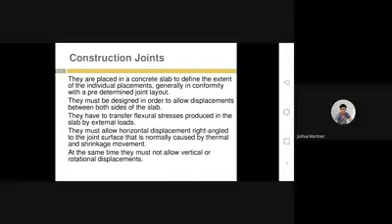Number two, they must be designed in order to allow displacement between both sides of the slab. Okay, masyadong elaborate yung definition niya, but ang pinaka simple definition ng construction joint is again to divide or to stop yung construction. Yung point of stopping the construction where it's difficult to make it simultaneous, yung pouring of concrete - that is the most simplest definition of construction joint. Okay, this is a graphic showing.

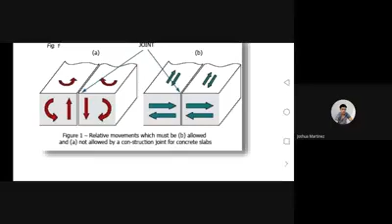This is purely engineering, showing the slab. There's movement on the slab - you have torque, lateral movement, and up and down vertical movement during earthquakes. You also have torque, twisting, where the ground rotates, so your building will also rotate and you will encounter cracks on the building, on the flooring, on the walls, and even on the columns.

If you have an irregular structure, like a mansion, in between the small building and the big building, you will definitely have a crack on that part if you will not put an expansion joint or a construction joint.

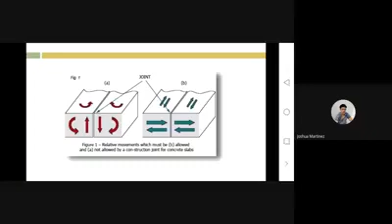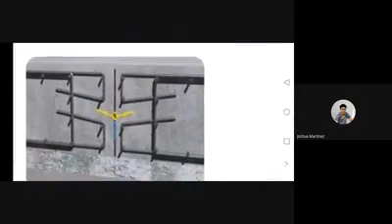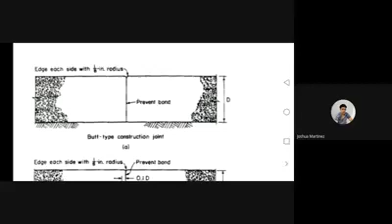So this is the section, a common section. Say we have a concrete slab, we sometimes have a construction joint, a butt joint, butt type. This means the left side will be poured first, and then the right side will be poured the next day or next few weeks. This is what we call a butt type construction joint.

Then for others, like precast concrete, you have a tongue and groove type, similar to wood. Since it's precast, say for concrete piles or flooring, you have this type of construction joint. The concrete is precasted somewhere in the factory, the panels are poured separately by piece, and on site you will just combine the panels to form the slab or the walls.

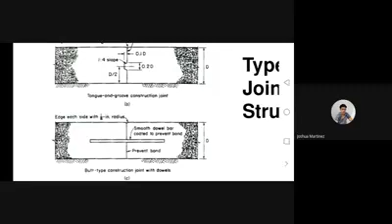This is for roads. You can see this type in roads - you have a dowel. On the first two types, you don't have a reinforcement bar, but on the third type, this is a dowel or reinforcement bar used to join two concrete panels. This one is very common in roadways, especially for roads and pavements.

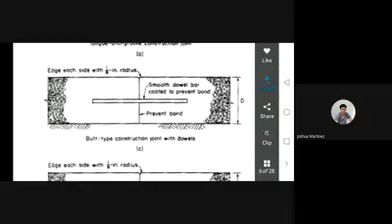You have one that is a smooth dowel, probably a round bar, but I don't know why round bar. Preferably, I prefer the material to be deformed bars, the actual rebars. With a round bar, it's almost useless. For me, a round bar is very useless.

Now, expansion joint - this is what I've been telling you about. An expansion joint is when you have to divide the building because the building is already very long. Minimum in the building code is 50 to 60 meters maximum length for every building. So if you have a longer building, you just divide it into two. It's up to you where to divide it, as long as you meet the requirement, minimum being 50 or 60 meters or less.

One reason for an expansion joint is if you have a very long building. The second reason is when your building is irregular - say your building is not rectangular, or has a different shape. I'll show you graphics later. Say your building is L shape, T shape, or U shape, and other shapes like that.

So if you have a T shape, you have to divide the building into two pieces. The intersection point is where you will put your expansion joint. For a T shape floor plan, you have one expansion joint. But for a U shape building plan, you need two expansion joints, at the intersection points. And then for other shapes like that, I'll show you later on.

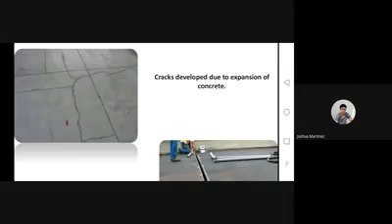For examples, guys, we're not at Adamson, but in Adamson you can see the flooring has many cracks. The building is old and we've had many earthquakes already, so of course the slab has many cracks. The one supporting the slab where the cracks are is the rebars inside, so that's why it doesn't collapse.

This straight line is actually the control joints, but again, the control joints couldn't handle it and the cracks really showed. Usually the control joint or contraction joint is the one to control these cracks. But again, the crack still appeared on the surface. Maybe due to the strength of the movement, the earthquake or ground movement was so strong that the crack became obvious, shown on the surface. This is common on skyways, flyovers, or bridges. This is what we call an expansion joint.

Need of expansion joint in concrete. So again, why do we need expansion joints? First, because there are movements on the ground.

Second, because of thermal heat and cold, the temperature changes, especially in tropical countries where we have very hot temperatures. So the material, every material, expands and then contracts or shrinks. There's movement in the material itself because of the temperature from the sun, or from cold weather during rainy season, cold season, or snow in winter season. All materials, especially concrete and steel, expand and then shrink. That is why cracks will occur if your material expands or shrinks, since there will be cracks because of the temperature change.

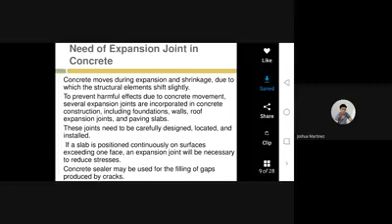Characteristics of expansion joints: it permits thermal contraction and expansion, same as before, so it will permit contraction due to thermal or heat, and expansion. It is designed to safely absorb the expansion and contraction of several construction materials. The vibration, if you have equipment like generators or air conditioning, causes vibration on the flooring and walls, so this can be avoided. Cracks can be avoided if you put expansion joints.

They are normally located between sections of bridge slabs. I'll show you later the points where it's located. It is simple.

These are examples of expansion joints. Commonly they can be seen on bridges, masonry -- meaning concrete walls, concrete slabs, or CHB bricks -- and railroad pipes. In pipes it's important to avoid leaks, especially during earthquakes, so they have to put expansion joints.

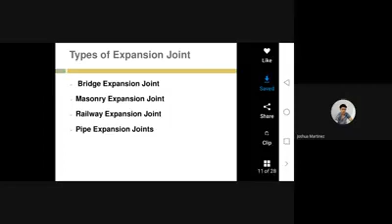For bridges and flyovers, this is very common. You can see this in EDSA, Makati. In flyovers, there's a gap in between, around 50 to 75 or 100, sometimes more. So to cover the gap, they put steel plates.

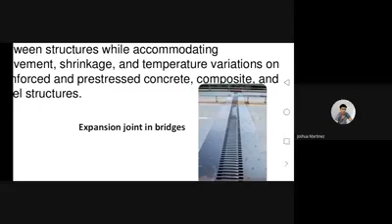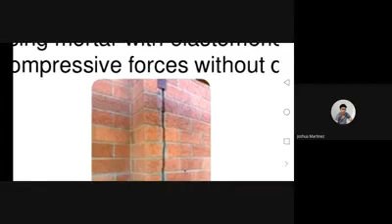And then for the masonry, like the brick wall, they also need to put a gap in between. Because the crack will definitely happen at this point. So you need to intentionally put the gap. You need to install the gap. We should anticipate the part where the cracks will happen. And this can be treated with aesthetic or groove.

Clay bricks expand as they absorb heat, and again, clay or hollow blocks also expand during heat or moisture. They shrink or they expand. This places compression stress on the brick. And once they expand, the cracks will happen. A joint replacing mortar with elastomeric.

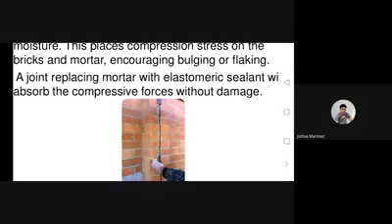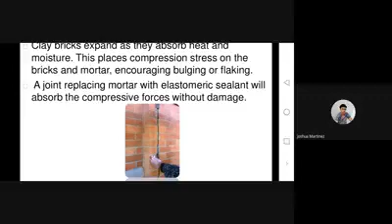Okay, so in the gap, usually we put sealant, elastomeric sealant. Similar to what we put on windows, those are rubberized, to cover the gaps, and absorb the compression forces without damage. So during ground movement or thermal expansion, the joints can handle the movement without any damage to the material, because it's rubberized. It's elastic. So no problem with the joints.

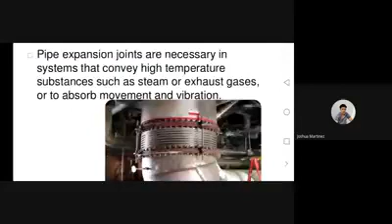So for the MRT station or PNR station, we have these joints. Especially during earthquakes, to prevent the train from derailing, they put expansion joints on the rails. And this is for the pipes. These are very flexible expansion joints. This is very common now; Manila Water or MWSS is now installing this in water supplies to prevent damage during earthquakes.

Because once we have the big one, we are expecting the big one earthquake in Metro Manila, damage will be reduced and we still have supply during disasters. Water supply is very important to humans. Okay, rubber expansion, fabric expansion. These are the types of expansion joints: rubber, fabric, metal, toroidal. This is more on engineering already. No need for this one.

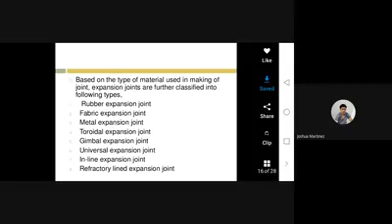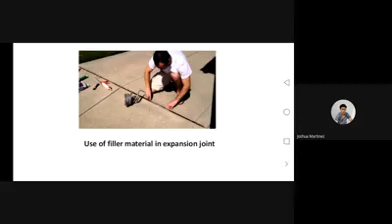So this is the filler. On the gap, on the expansion joint, you put fillers. If not sealant, you can put rubberized material. Actually, any material that is rubberized or flexible, you can put on the joints.

Guys, the reason I'm discussing this is for your plate tomorrow. I'll show you the plate tomorrow. In prelims, we already finished structural, the skeleton, the basic structural support of the building. So now we will proceed with midterm. I will concentrate on movement and joints, and waterproofing on buildings to avoid leaks. So tomorrow I will discuss that.

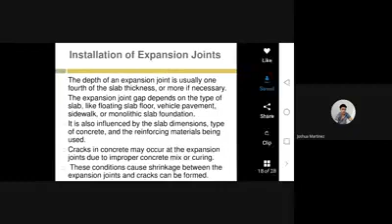Can you follow? Are you still there, guys? Just to check. Sorry. Are you still there? Yes, sir. Yes, sir. Okay, thank you.

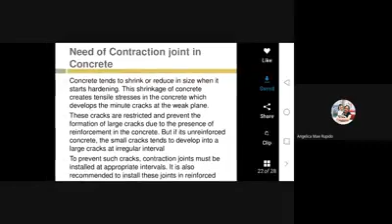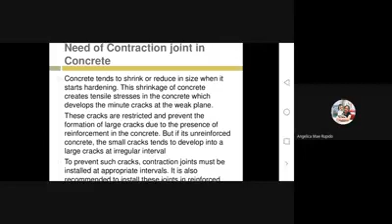Again, guys, the reason is basically the same. The reason for expansion joint and contraction joint is almost the same. Concrete tends to shrink or reduce in size when it starts hardening. Shrinkage and expansion, it's the same with expansion joint. So the reason is almost the same in all, except for cold joints. Cold joints have a different reason. To prevent cracks, contraction joints must be provided.

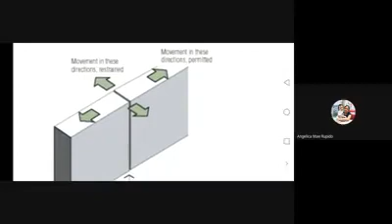So this is on the wall. You have a contraction joint at the middle, so now the wall can move freely. If you have an expansion joint or contraction joint, your walls can move freely during a mild earthquake or ground movement, and the cracks will be avoided. And in the gaps, you have the rubberized sealant.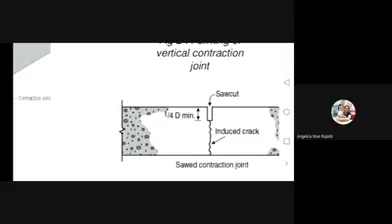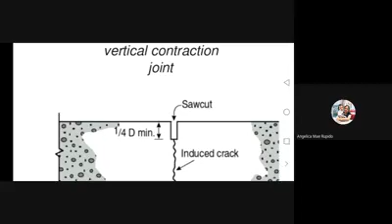Now, guys, this is commonly used on sidewalks, pavement, or slabs. It's not a construction joint. The concrete is poured at the same time. This concrete is monolithic. So we need to put a joint, and the way to do it is by using a circular saw. They will cut the slab, not very deep, just on the surface. About 12 mm, or 6 mm. Say 6 mm. They will just put a line on the concrete.

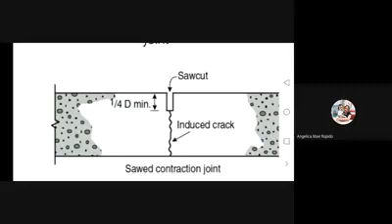And then once cracks happen on the lower side, they will immediately go to the saw cut, the groove line or contraction joint that you made using the circular saw. And you cannot see the cracks on the exposed surface. You only have cracks below. But on the surface, you don't have cracks. You have a very beautiful saw cut groove. It's just groove lines.

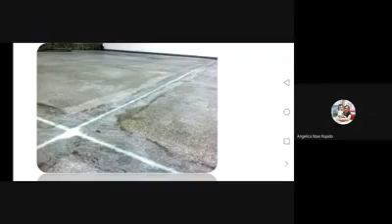Isolation joint naman, guys, is when you have two parts of the building that are separately constructed. Say yung column. The column is separately constructed from the slab. So in between the column and the slab, you have to put isolation joints, kasi separate sila, separate parts of the building. So if you will not put an isolation joint, imagine guys, if the column moves because of ground movement, your slab will have cracks, kasi you did not put isolation joints on the perimeter of the column.

So if the column moves, obviously yung pinaka weak, the weakest, is the slab. The column is stronger, so the crack will happen on the slab. Because the column is stronger than the slab, if you have movement, your slab will have cracks. So in order to avoid cracks on the slab, you have to put isolation joints, and then you need to put sealant to cover yung gap.

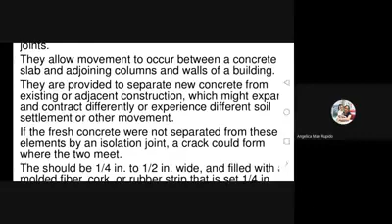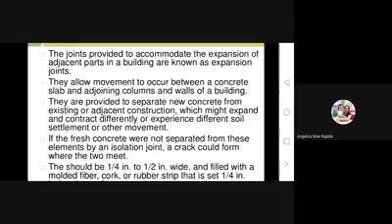Again, the size of the isolation joint is around 1/4 inch or 6 mm to 1/2 inch, 12 mm or 15 mm, okay. The bigger for me is okay. Also, this isolation gap on the floor, between the slab and the column, is usually where termites and ants enter our house. That's why you need to put isolation sealants or any rubber strip, cork or molded fiber.

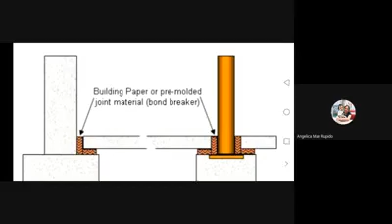Okay, this is an example. So these are isolation joints. You have the column and the slab, two items constructed separately. So again, to avoid cracks on the slab, the weaker item, you need to put isolation joints. So parang ganyan siya, guys. Actually, at the bottom, kahit hindi na, on the vertical lang. The horizontal part, maybe no need na. Their contact point is only on the side once there's movement. Okay, these are examples of isolation joints.

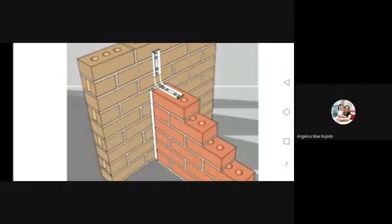On the walls, the first wall was constructed first, then the second wall was constructed on another schedule. That's why you need to put isolation joints here to avoid cracks, kasi separate items, separate parts. Okay. This graphic here is more interesting, to show you my point. Expansion joint and construction joint, okay?

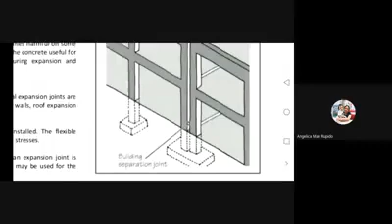So this graphic shows a very, very long building. The building is divided into two, so you have two columns. Usually ganito din ang technique ko, guys. This is the best joint for me, the strongest joint I always use in my projects in Chiyoda. So I have two columns. Before, hindi ko naintindihan, guys, but slowly, after checking all drawings, I realized the importance of the construction joint. It looks like a big waste of money.

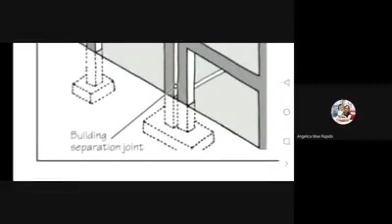Imagine you have two columns in the same location. At first, it seemed weird to me. I didn't know the reason why they have two columns in the same location. But later on, after reading the structural codes, I realized that this is actually a very good technique to avoid cracks. But the foundation is combined. The columns can move freely and they sit on the same foundation. Your columns, your walls and the slab can move freely without any cracks.

Even on the roofing, we just put flashing on top of the parapet. We just put flashing. We will use this in your 3-story mansion. I will teach you how to do this.

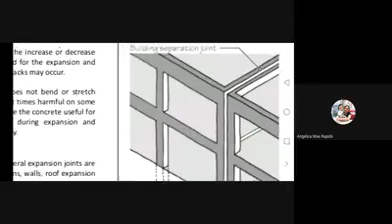Again, if you read this one, the reason why we need expansion here is because the material expands and contracts with increase or decrease in temperature, thermal expansion or shrinkage, and also because of movement on the ground, on earth, earthquake.

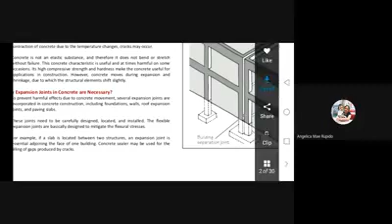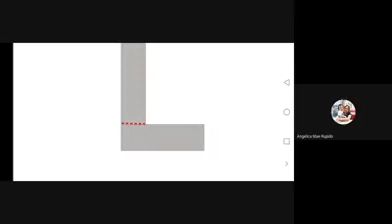For the bottom part, this is what we call expansion joint. No, this is construction joint. If this is a footing, this is a construction joint. But if you look at this one, say this is a building plan, your shape of the building is L shape. So we now call this one an expansion joint. Kasi again, your building floor plan shape is irregular. So you need to separate the L-shaped building into 2 buildings na.

You have 2 smaller buildings na. So this is the correct position of the expansion joint. Kasi during earthquake, you have torque. Yung torque is rotation on the ground floor. So if you did not put an expansion joint, one of the buildings will definitely collapse. Kasi yung stress will be centered on this area. Can you imagine, guys, if you have the ground move rotated, mapuputol. Your building will collapse on one side.

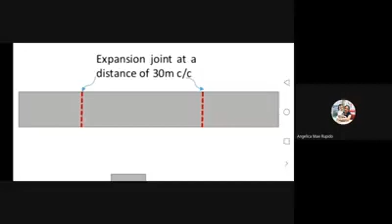Can you still follow? This is very important, guys, kasi karamihan ng architects, they just rely on engineers where to put the joints. And hindi sila aware actually kung saan yung damage ng building during earthquake or kahit mild movement on the ground.

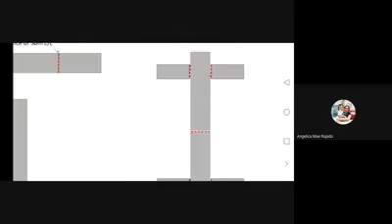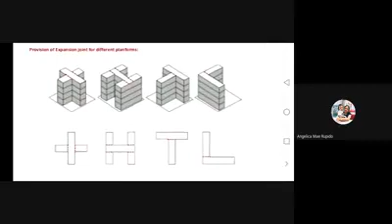Okay, this is another example of a building. This is an I-shaped building. So again, if you have an I-shaped building, you need to divide this building into how many parts? 1, 2, 3, 4, 5, 6. 6 parts. Okay, guys? So your slab is divided. Your slab, your walls, your column is separate. So you have 6 buildings here. Okay, these are more examples. So the red part is where we put the expansion joints. Kasi we architects usually design very irregular shaped buildings.

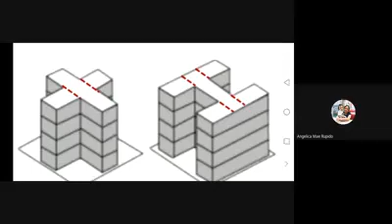In my practice in Chiyoda, very boring dun eh. Bored talaga ako dun actually. They don't want irregular shaped buildings. They just want a square type building. Imagine, very boring. Kasi we have extra force pa behind. A blast resistant building should be simple shape lang. But minsan, they give me administration buildings, very far na from the blast area. Administration buildings, accommodations, condominiums, hospitals.

Okay, guys, I hope you understand this one. Any questions so far? Sir, paano po kapag curve yung structure ng building? Yes, yung curve. Okay, you have to measure the circumference. So at least yung circumference niya, wag mag-exceed ng 100. But if you exceed 100 or 60, you need to divide. So say your circumference is around 200. So you need to divide the curve into 4 parts. Quadrants na siya.

The expansion joint, you cannot actually see on the architectural. You can actually hide that one in the structure. Kasi we have finishing. On the flooring, I will show you the finishing later on. Very, very good finishing sa flooring, sa walls. I will show you examples. Maybe I can show you now. Hold on.

For your exam, I'm actually preparing na your midterm exam. Guys, huwag kayo magtatampo kung maraming exam ko, ha? 100 items. Kasi kahit sa Viscom, ganun din, 100 exam din. First semester, okay. Technical.

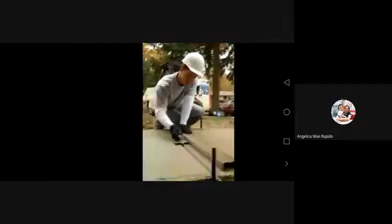Joints in concrete, okay. So this one, wala pa siyang bakal. Wala pang expansion joint. There's an expansion joint, but wala pang covering. Oh, this is isolation joint. This is, guys, monolithic yung pouring ng concrete. Same time yung pouring ng concrete. But nag-put lang siya ng line.

The concrete is still wet, but he just put a line. Hindi siya nag-sokat. Sokat is when the concrete is already dry. When the concrete is already solid, you have to cut using a circular cutter. But this one, the concrete is still wet. You can just put a line for the contraction joint. This is contraction joint, guys.

Okay, this is actually that one. No, ito yung section niya. But this one is sokat, guys. Sokat is when the concrete is already hard. No, you need to use circular saw and then cut the concrete. This one is still wet. So nag-cut lang siya using tools. The concrete is still wet. Okay, guys? You just try to observe lang in the road or pavement, sidewalk kung saan.

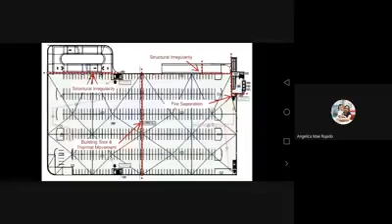Now ito guys yung example ng expansion joint. Say yung car park, ang haba ng car park, more than 100 meters. Siguro this is around 200 pa ata to. Or say 100 na lang. Mukhang 100 lang siya. So it's divided into 2. Ito. Actually, it's divided into 3 parts, guys. One, yung siya yung ramp. Kasi irregular shape na siya eh. It's not rectangular. And also, yung ramp is different ang structure niya. It's concrete. So you have joints also here.

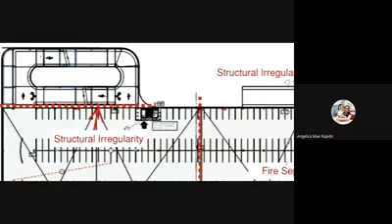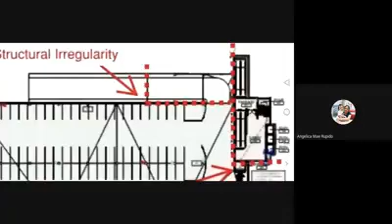So how many buildings now here? 1, 2, 3, and 4. 4 buildings siya. Or 5 pala. Sorry, 5. May ramp pa pala dito. Because of irregularity. Because this is also a ramp. This one is a ramp. And this one is ano to? Siguro this one is yung elevators, yung vestibule, yung building. So it's separate. So you actually have 5 buildings, no? But in architecture, you cannot see that it's divided into five buildings. Only in structural you can see this one. But your building is safe from cracks, from damage. It can move freely during earthquake.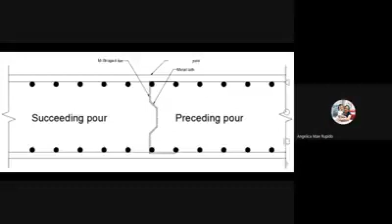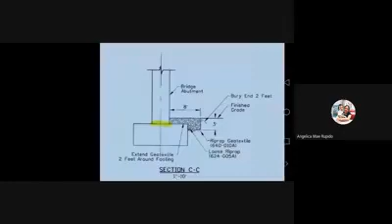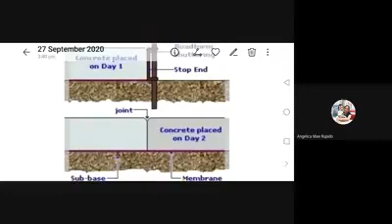Okay, ma'am, did I answer you? Did you understand? Sino nagtanong? Yes po, sir. Thank you po. Okay.

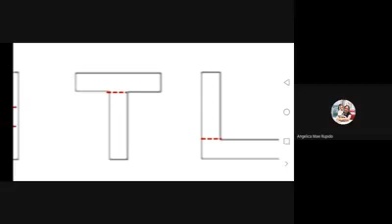Actually, guys, in architectural, if you're designing or thesis, you don't need to put this one. I just want you to be aware of the principle ng structural, para in case hindi kayo mabola ng engineers. Hindi kayo masabihan na hindi nyo alam ang ginagawa nyo. Actually, it's common sense, guys. Talaga, we need to do this one kasi we are trying to avoid yung collapse ng building. Your building should survive 50 years or more. And especially during earthquake, the occupant should be safely evacuated on time. Damage will happen, but we are trying to avoid yung immediate collapse. That is the biggest problem that we have.

Imagine also you have elevators here. So your elevator is very, very strong parts of the building. So you need to properly locate the elevators. Anyway, that one will be designed by engineers, but I just want you to be aware. It's common sense talaga, guys, para hindi lang kayo maloko ng engineers. Okay, these are another examples for the flooring, expansion joint on the flooring.

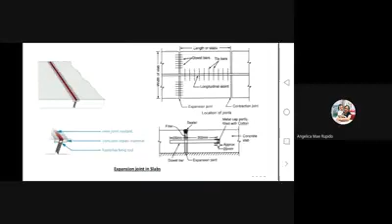Halos lahat ng ginawa ko, guys, may ganito. And the malls, meron din ganyan, marami ganyan. Hindi lang tayo aware sa architectural kasi hindi natin binibigyan pansin. But this is very important talaga, kasi it will affect our aesthetic. Yung decorations natin sa wall finish, lahat ng materials natin is affected because magka-crack. We are trying to avoid yung damage to our materials, especially yung mga expensive materials, yung stones, yung marbles, yung granite.

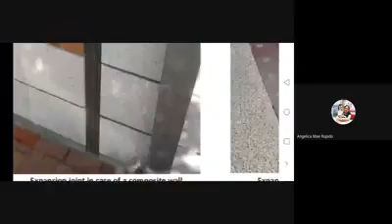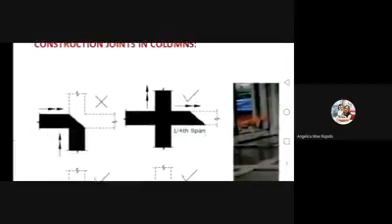Okay, so this is for on the walls, nag-install na siya ng expansion joint. And this is again for on the flyover or bridges. And this is okay. Maganda to. This one is okay. Okay, guys. So yung X part on your exam, may ganito din tayo ha, guys. I will include this on the exam. So merong wrong way, then merong proper way.

Say you're doing a house in the Philippines. Again, Philippines maraming problem, traffic problem. And then your concrete, the delivery of that one truck was delayed. So on site, you need to do something to solve the problem. So the proper way of solving the problem is you do this one. Not on the column, but this one. This is acceptable. This is usually done on site talaga. But as much as possible, we try to avoid. This is last resort.

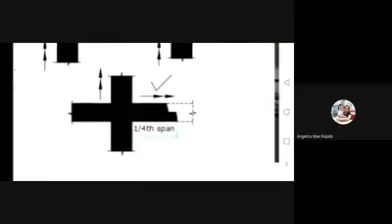Okay, construction joints can be done on this part lang. Separate siya. This one is also approved. But not this one. This is totally wrong. Actually, guys, this is also done. Say your budget for your housing project is limited, but you have a very big lot, and you expect money next year. You can do this one as part of your expansion project, say your phase 2 project. For phase 1, you can leave the right side for future expansion, and then prepare the building for expansion to the right side. This is acceptable. This is safe.

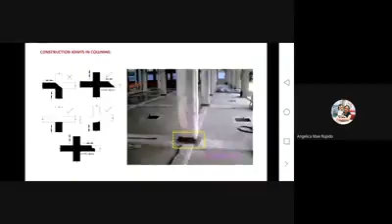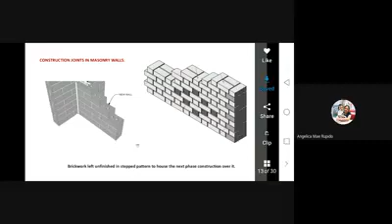Okay, for the walls, brick wall or hollow blocks, actually, I prefer straight line lang. This one meron pa siyang metal band. I think the simpler type is yung straight lang. Just do it straight line lang. Simple the better. Okay, this one is again brick wall. And this is for the tongue and groove connection. Okay, yun na.

Okay, I think that is all for now. Guys, what else pa ba? No, not this one. I'll check lang if I forgot something. Okay, I think that is good for today. Baka hindi nyo na ma-observe yung iba. And then application, we will apply this in 3-story mansion. I will teach you how.